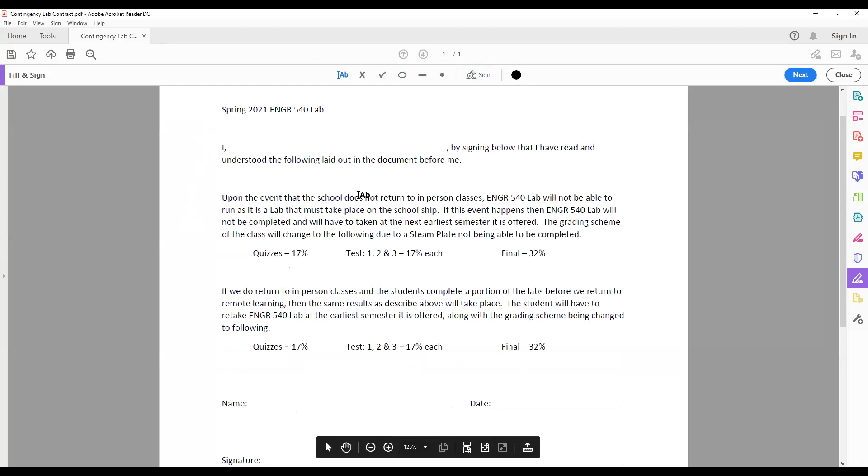So going from there, basically these are two events that could happen. One, we never come back to school this semester - catastrophic failure, basically we don't return to school. If that happens, you will have to take 540 lab the next semester it's offered, whether that be the spring or the fall of next year. If that happens, we can't do the steam tracing or the steam plate.

So that 10% will be broken up into 2% each. Quizzes will go from 15 to 17. All the tests will get 17% each, and then the final will be 32%.

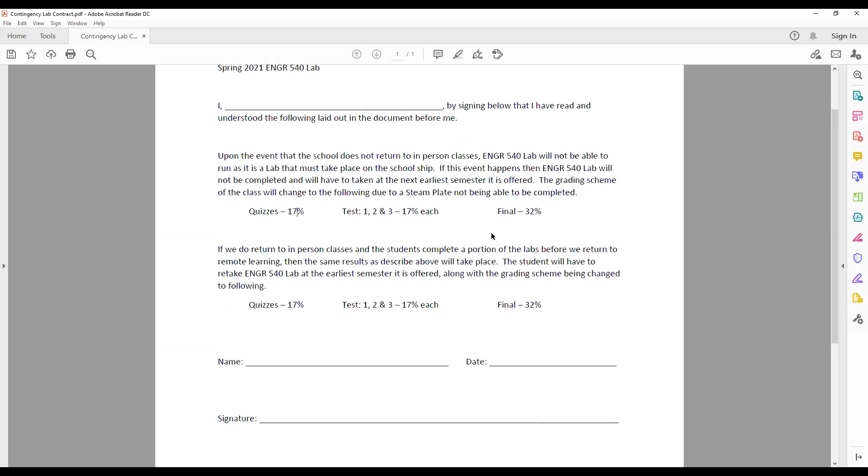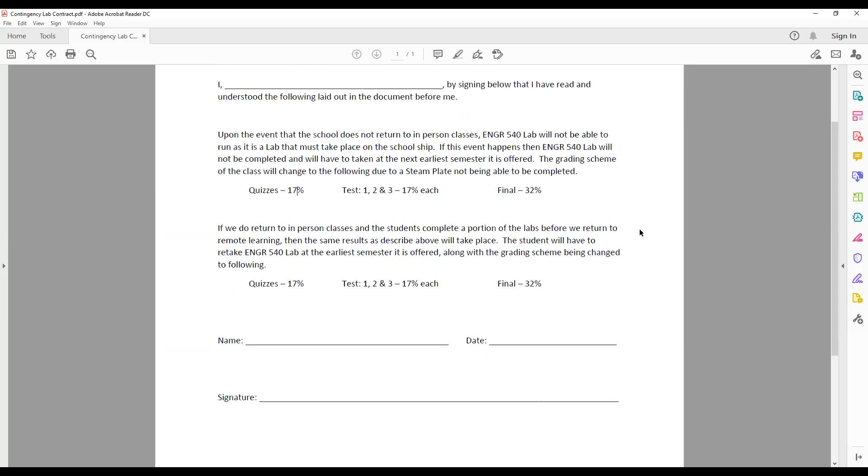Same thing will happen if we return to in person and then we get shut down by the state because we have too many COVID cases. So same thing again - this is a 14-week lab that we push down into a 13-week semester, which is getting pushed down into basically 11 weeks. So if you don't attend all of them, you're not going to be able to go get on cruise. This is a mandatory piece.

So sign and date this, get it to me by Friday. If we print it out, sign it, that's totally fine too - scan it in, submit it. Thank you. I just made it so that if people don't have scanners, which is more common than you would think. When I went to school back in 2011 as a freshman, every time you bought a computer the big deal was you get a free printer and scanner. Now you guys get like headphones or something, whatever it comes with.

Is that one under the lab section of Blackboard, or is that in the lecture section of Blackboard? Good point - there will never be a time I use the lab section of Blackboard.

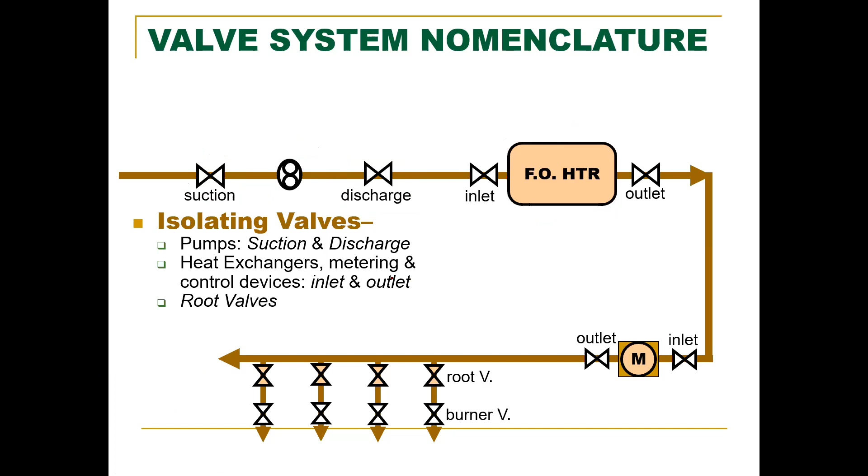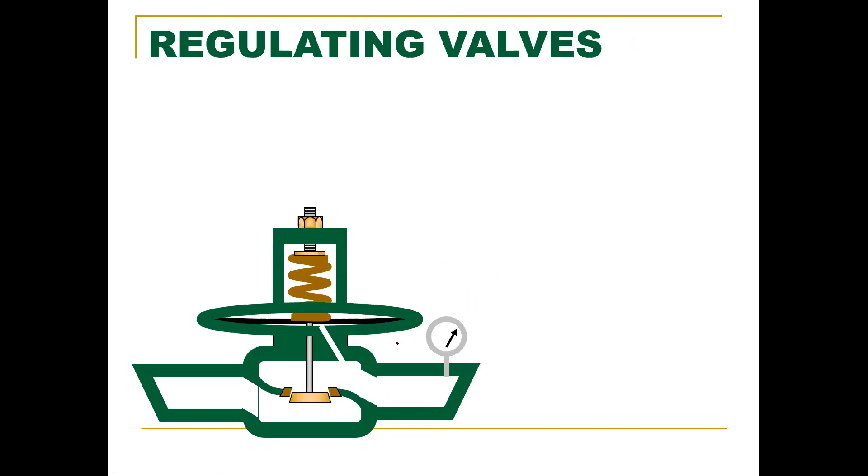So we have a regulating valve, a pressure regulating. This one is maintaining downstream pressure. So if we look at it, the way we always talk about, the new word that we're learning basically with this, is downstream and upstream. What do they mean? What are they in reference to?

The best way to think about it is if you are standing on the edge of a stream. We'll do position 1 and position 2, and then we got letters A, B, C, D, and E. If you're standing at position 1, that's where you are in location, and the river flows this way. What is upstream to you?

A is upstream, because that is the farther up of the stream. The stream is flowing that direction. So what would be considered downstream in position 1?

E. Well, B would be pretty much even with you. I said E, yes, but so would C, D, and E, right?

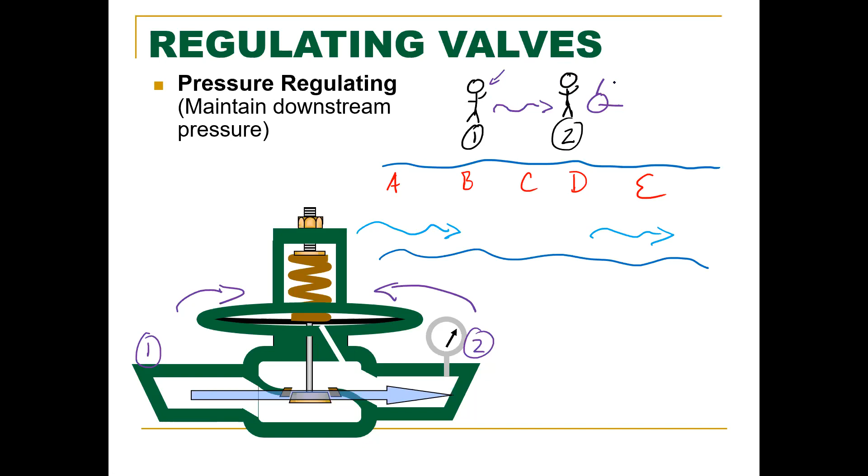And as you change your position or change equipment, position 2 may be a pump. As you change position or change equipment, your downstream, upstream terminology will change. It's in whatever you're referencing to.

So this one is maintaining downstream pressure. We know that by a couple of things as we start to decipher these types of valves. We have a spring, we have an upward seating valve, and we have this black material right here.

That black material, you can think of it as a gasket. It's super thin, super strong. It's usually made of metal, sometimes metal and rubber. It all depends on what type you have.

And what's happening is that it's going to bend, manipulate up or down. I'm going to draw this a little bit bigger so we can see what's going on down in that area.

So that black line is going to be this bottom bowl part. This blue is going to be that gasket material. There's our line right here. And then I'm going to draw in red the stem that goes down into the valve.

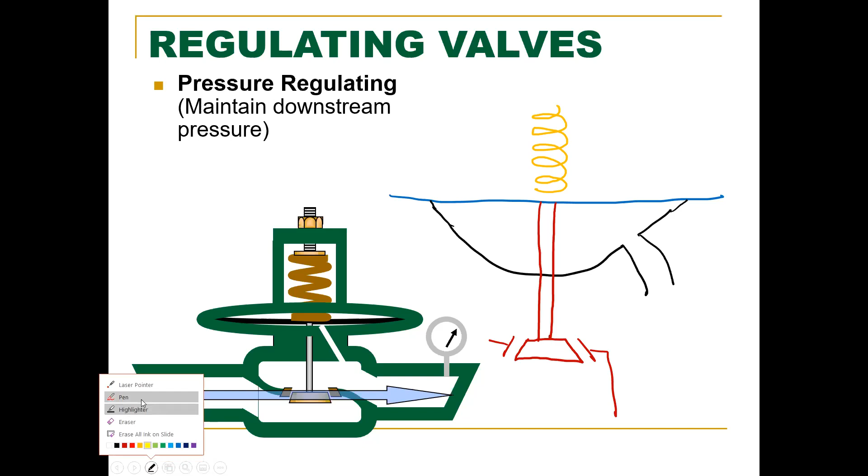So we have three things that we have to pay attention to, that will allow us to decipher any one of these valves and what's happening. The first thing is the spring. It comes down to, where is the spring? Is it above? Is it below? Where is it acting on? Where is the force going to be applied to? All of those questions go to that.

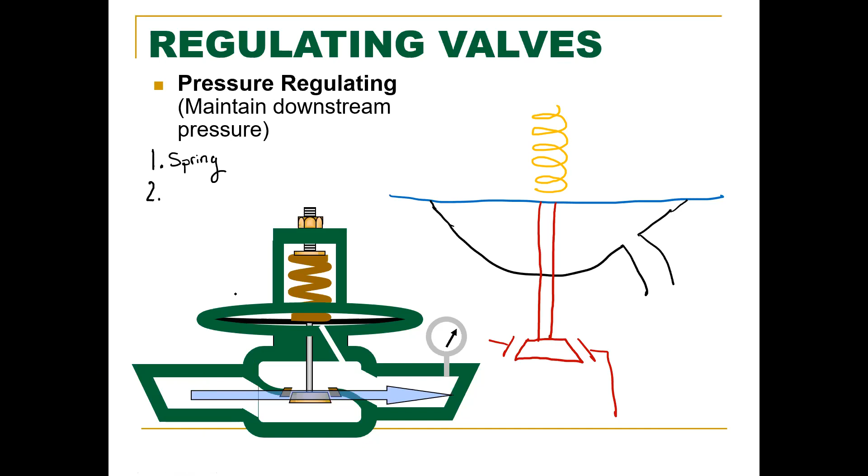Then number two is, where are we taking a sensing from? Where are we concentrating? Where is our input going into the system? Is it coming in below? Is it coming in above? Are we taking it from the upstream side, or the downstream side? So where's the sensing line?

And then finally, number three, is it an upwards or downwards facing valve? Is it going to seat in the upward direction, or is it going to seat in the downwards? So the physical valve itself. Those three things, you'll be able to understand all of these valves.

So first things first, we're going to be doing this with pressure, because we're doing pressure regulating. If I say right here is 60 PSI, and this is just a bigger version of what's happening here, is 60 PSI the same over here and over here and in here, or is it different?

It's different. Why would it be different? Because as it's flooding in, it's going to be moving faster. If it's further down the pipe, then it won't be as fast. So you're saying way down the pipe, there's going to be line loss. Yes. But in this instance, we're talking about a mere couple of inches.

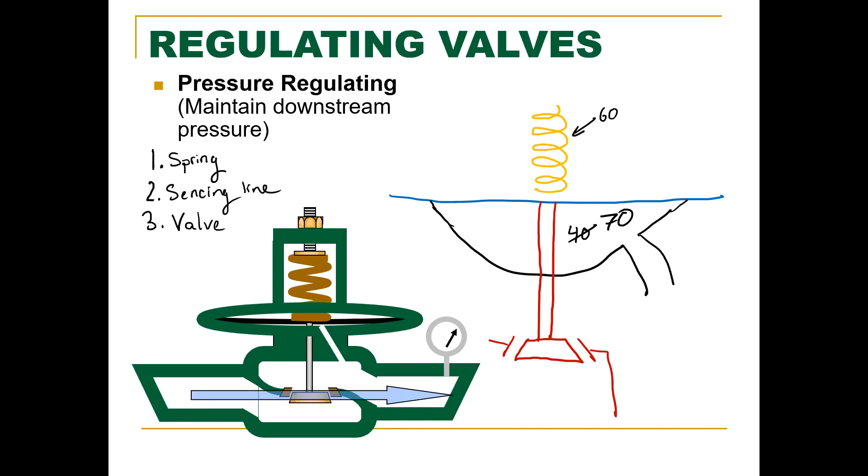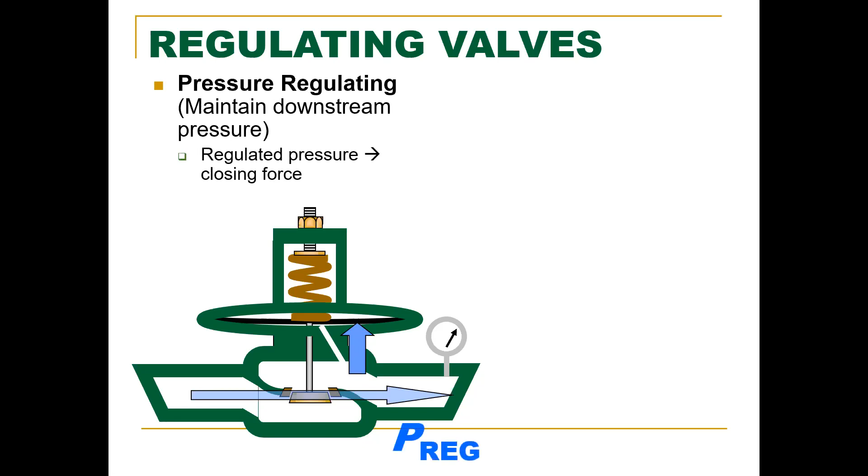Does that make sense to everybody? Okay, good. So the regulating pressure is going to be the closing force, like we already discovered. And the spring is going to be that opening force.

Now we have a different valve over here.

Same three principles apply. We have the spring, where it's sensing, and the valve. Is it upward or downward seating? Granted, these examples have only an upward seating valve, but in the next slide you'll see a downward seating. You can also have a sensing line that comes in on the bottom. So don't think these things will always lead to the exact same result.

These are just the most basic and most simple, efficient way of doing these things. So looking straight at this, what is the spring? Is the spring the opening or closing force? Your spring's the closing force, right? Not just because it's below the baffle, but because this is going to close it with that force. It's where it's physically attached to—it's attached up here.

So if we had a spring worth, let's say, 70 psi, and we want to maintain our upstream pressure at 70 psi, well if this is 40, what will happen? That means we have 40 up here as well, right? So 40 pounds being pushed down can't overcome 70. Now that valve will close and it will allow the buildup of pressure.

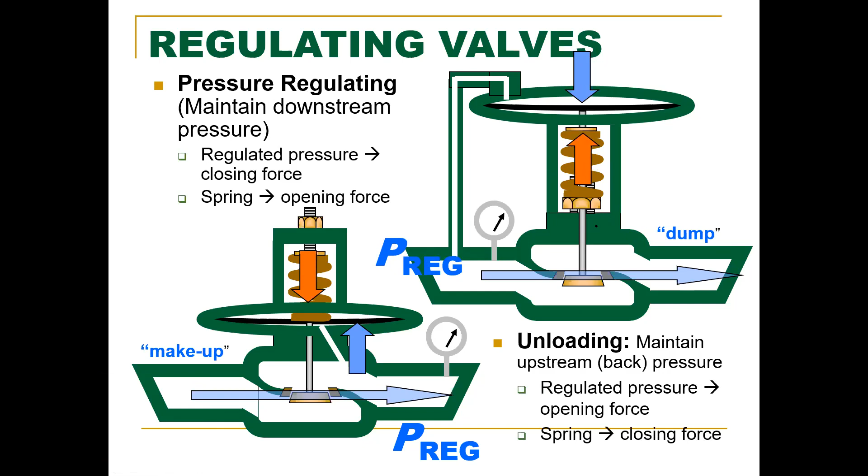So that's our control valve. Then we have a fuel oil pressure regulating valve. Think about it—if we're using fuel oil, and the fuel oil we use on the ship is pretty much one step above asphalt, that's some nasty stuff. We're lucky if these valves have like half an inch in between, an inch if you're lucky. That fuel will clog that up so quickly and these things would just be trash.

So an analog version of what we use with this is some sort of control air—an air signal that will interact with those baffles, that sheet of very thin metal, instead of the fuel. Nowadays you'll probably have a digital version where it's a solenoid valve that's motorized, opening and closing electronically. But this is the analog version—very mechanical.

You can see right here, as I said earlier—sorry, this is downward seating, and this one seats in the upward direction. So it seats going down. You can see that crevice. These aren't the largest valves in the world.

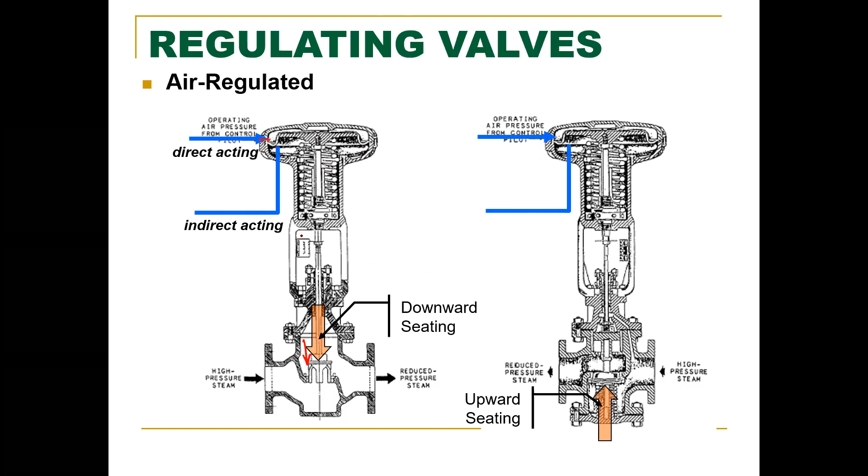All the way up in this area, you can see that little hole, that little line—compared to that valve, that's the air line that comes in. So if we had fuel going in there, this would be a huge problem. Going in on top, those are called direct acting, and below is indirect acting—that's just where the sensing line goes in.

The other place we use it is the fuel oil temperature regulating valve. Again, like we talked about, we go to pressure because pressure is easy. But I said earlier we could use sensors—anything you could measure, we can automate. So this is a temperature sensor. It goes in, sends a signal to what's called a pilot valve, and that pilot valve sends an air signal to another regulating valve.

So it's going to be sending steam to our fuel heater based on the temperature of that fuel coming out. If we need more steam because the fuel heater is cold and the fuel coming out is cold, or we need less steam because it's already at temperature, or it's too hot a fuel. Now, looking at it, these are our air regulated valves—this is our control pilot valve. We have high pressure steam going this way, and reduced pressure steam coming out of it.

So this is an actual spot that we would have on the ship. We would have 600-pound steam going in, and we would have what's called a reducing station, and 150 psi steam coming out.

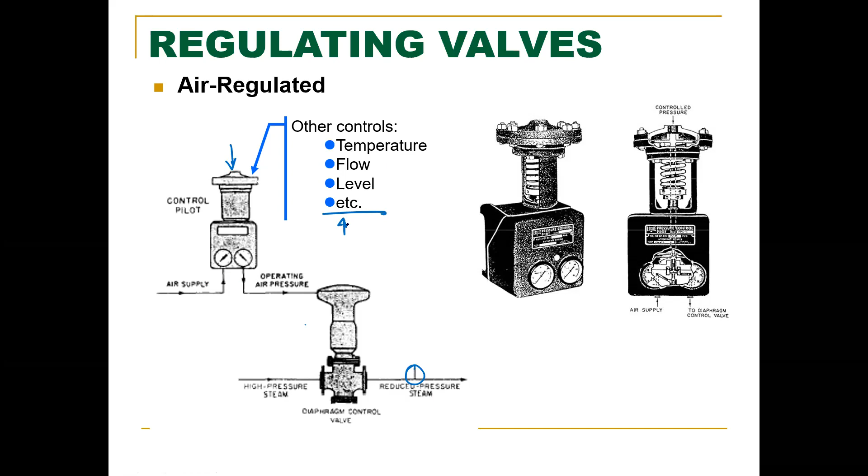Now we have something called normally closed valves. In everyday operation, if you just buy one of these valves and grab it off the shelf and hold it in your hand, this is my valve, it's normally closed. If you put it in the system, it will be normally closed. The only time that normally closed valve will open is under one condition.

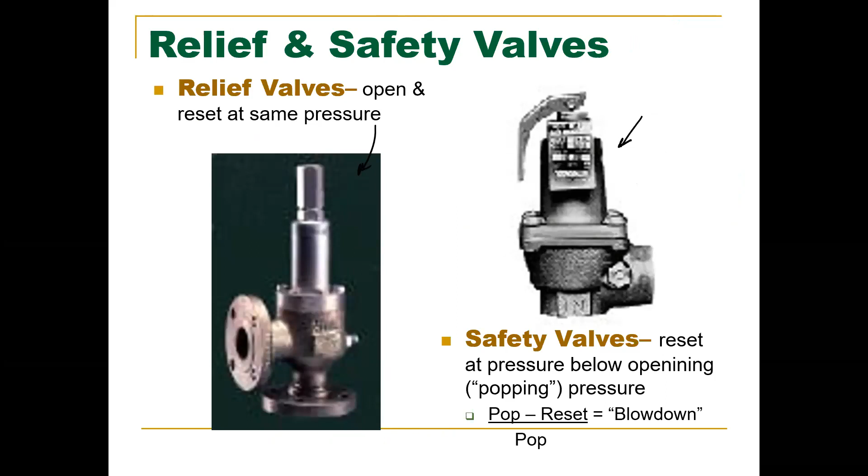Well, this meter might be a piece of plastic. It might have a plastic turbine inside of it - you know, one of those little kid things, a pinwheel that turns a rotation, a really mechanical version of a meter. Well, what if that breaks? And it clogs up.

Well, would we want to shut down the entire ship? Imagine this isn't a school ship - this is steaming across the Atlantic. We have places to go, we have cargo to deliver. Do we want to shut down everything just because of a simple little meter?

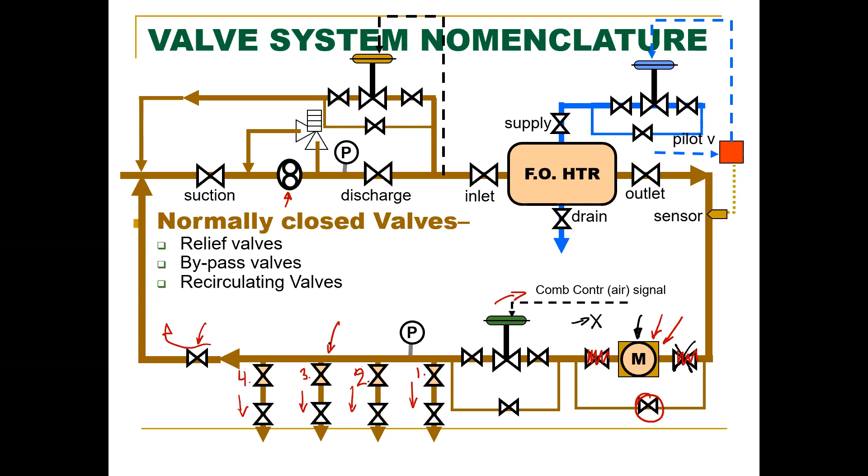Any questions on that? Anything we want to go over again? Because remember, quiz Friday - last class and this class. Anything you want to go over?

Professor, just a quick question - how are we making up that quiz on Friday? I could do it at work real quick at a different time if that's fine. Why don't you come to my office hours on Wednesday? Wednesday, okay sounds good, 1:30 to 2:45. All right, we'll do it then. Thank you. Yep.

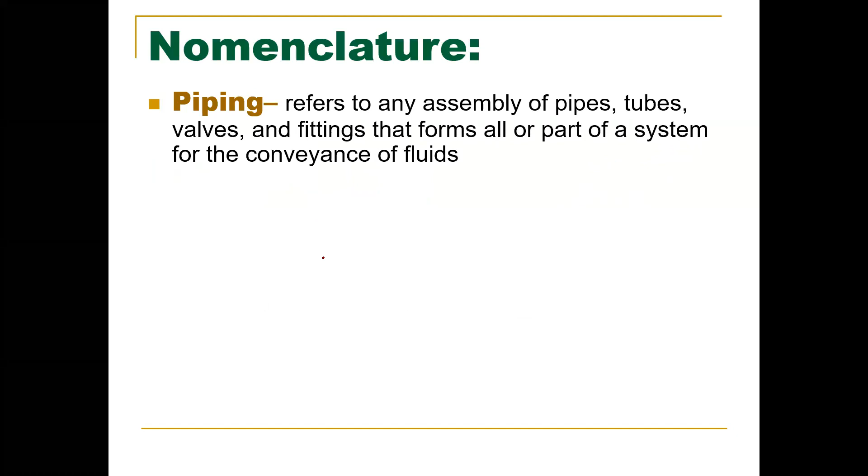So this is piping. Piping refers to any assembly of pipes, tubes, valves, and fittings that form all or part of a system for the conveyance of fluid.

A pipe refers to a non-flexible fluid conductor. It's designated by diameter and wall thickness, strength, or schedule - they refer to the same thing. Then we have wall thickness, and tubing.

Tubing can be and usually is bent at installation. It's more flexible than pipe and is designated by nominal outside diameter and wall thickness. We have fittings - those are devices employed to join sections of pipe, tubing, or hose in a piping system.

Now, we have nominal pipe size, or NPS, which is an approximate inside diameter of a standard pipe, Schedule 40.

Example: we have a 3-inch STD pipe. The outer diameter is 3.5 inches. The inner diameter is 3.068. The wall thickness is going to be 3.5 minus 3, divide that by 2, and we will get the actual wall thickness there.

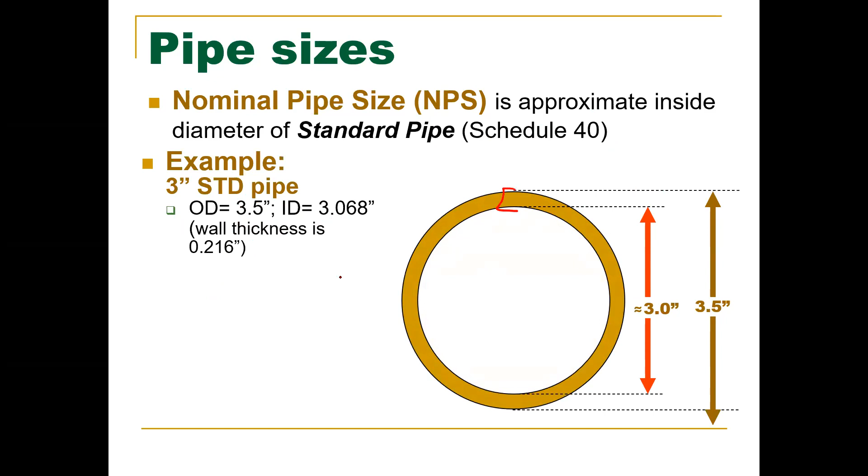Now we have a 3-inch XS, or schedule 80. This has an outer diameter again of 3.5. It has an inner diameter of 2.90. The wall thickness is now 0.3.

Then it keeps getting smaller, and we got schedule 160. So we can see as our numbers increase, we're getting a smaller inner diameter, but our wall thickness is increasing without increasing our outer diameter.

So if you were going to go and order one of these pipes, what would we need to know? Inside and outside diameters - well, we would want to know our inside and outside, but no one is going to label it that way.

If you opened up Grainger, your ordering paperwork, what are they going to be labeled by? I'm guessing like schedule 40, 50, so on and so forth. You're going to basically be seeing only that. All right, give me one second and I'll pull up an example. I didn't expect us to get to this.

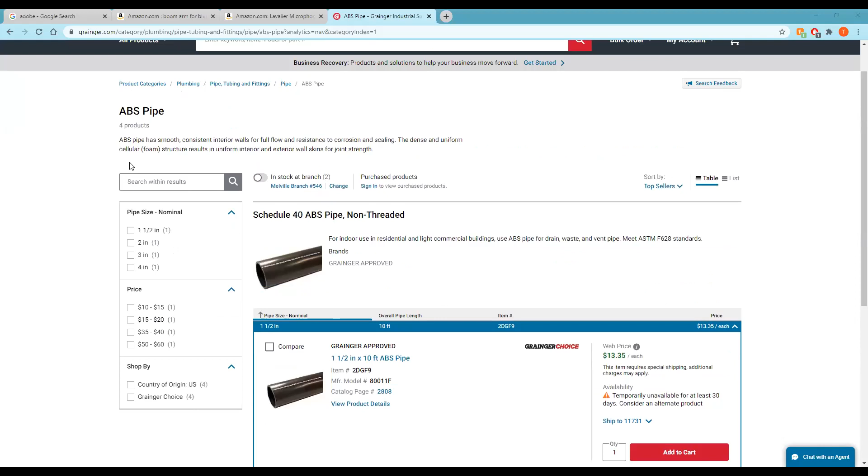We can go for pipe size nominal - so this is 1.5 inch, it's 10 feet long. ABS pipe, this one we could see it's schedule 40. So we'll know our inner diameter because of the fact that it's schedule 40. We are going to know the outer diameter because it's 1.5 inch, and then we know our length.

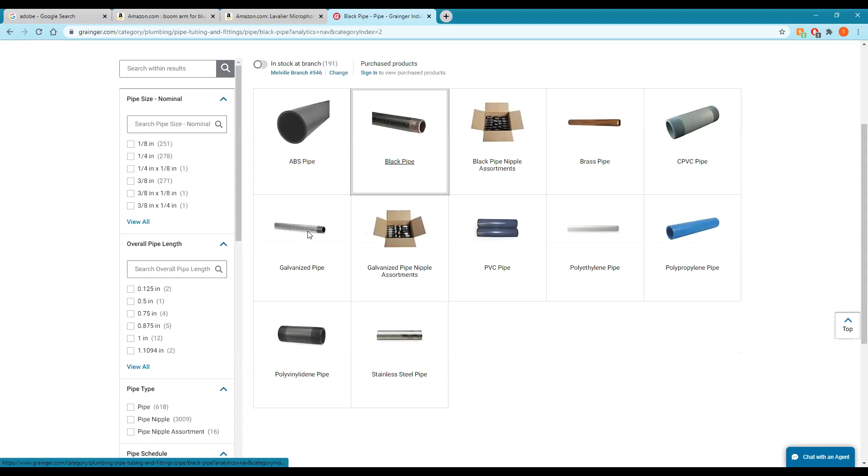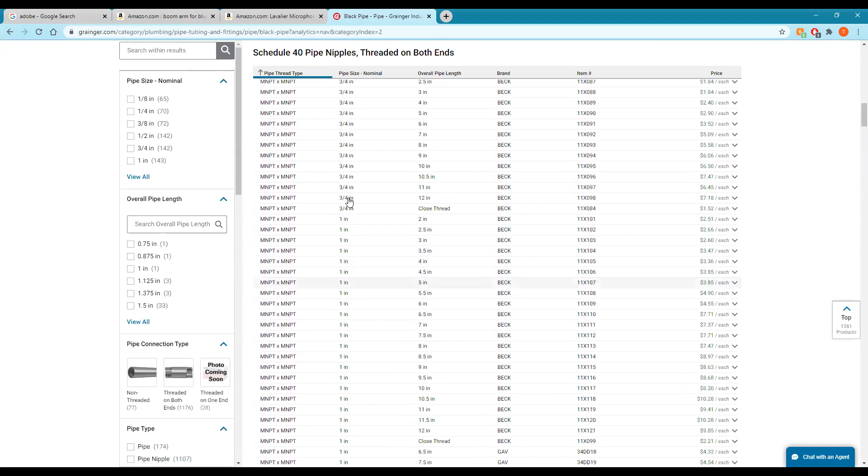Now if we go back here, here's black pipe - doesn't matter what it is every single time. Here's schedule 40 pipe nipples, that's a type of fitting we'll get into probably next class. These are all the different nominal pipe sizes and overall lengths, but even though it's a 2 inch, 1/4 inch, 1 inch, 3/4, they are all schedule 40. So that wall thickness doesn't change between any of these, but their nominal pipe size does.

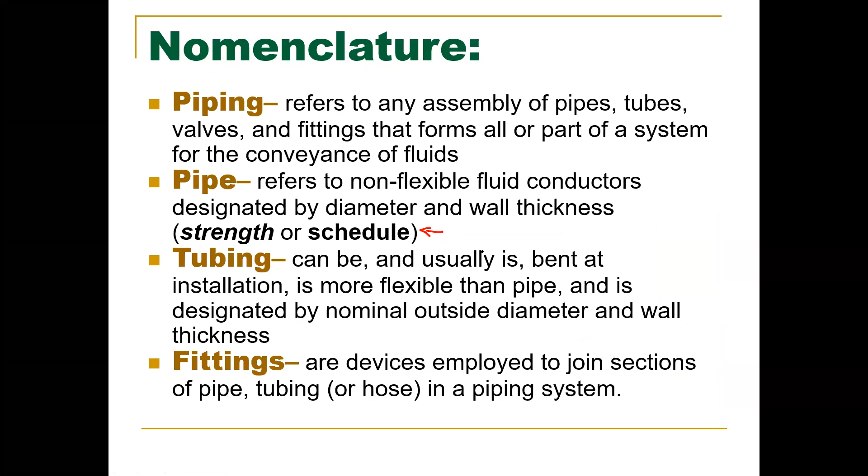What does nominal pipe size stand for again? So our nominal pipe size is that inside diameter.

So again, I'm not going to make you do the math to find out these wall thicknesses - it's just for your understanding. Understand that as schedule goes up, we have bigger wall thickness. It's important to know that.

Because I worked dredges, that's where some of my experience came from. We had armor plated piping - it started its life out at 3 inches thick, because every single day, 24 hours a day, 7 days a week, 365 days a year, this pipe all throughout the entire ship would be sandblasted all day long because we were sucking in sand. Our job was to move sand - we would suck up sand in one location and then blow it out somewhere else, or dump it somewhere else. That's what we were paid to do.

By the end of 6 months, I was taking measurements on piping on the outside wall. There's a device, an ultrasound device, that we can use to figure out how thick these pipes are. I had to do that because the piping we just replaced started to crack and send a slurry of sand and water into our engine room. This basically happened on a monthly basis, so we had to every 6 inches grind off some paint and take a sounding - it was called a UT sounding.

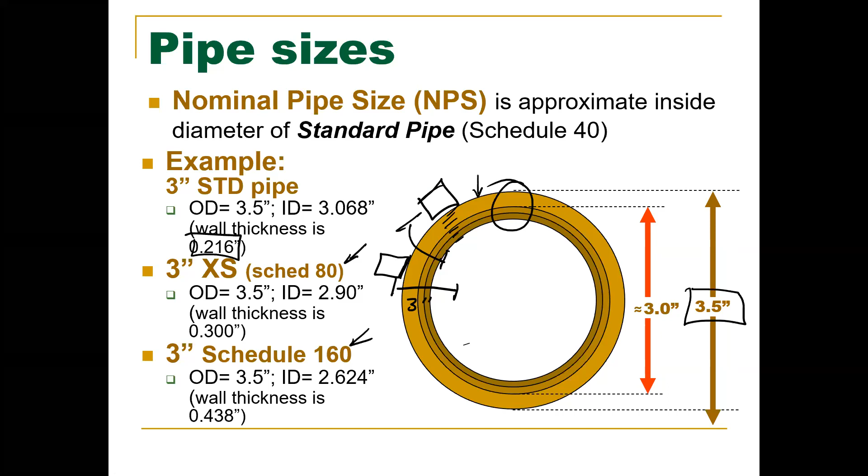You're going to have a really pissed off chief engineer. So these things are important to understand, where it's all coming from. You're going to be the one on the ship ordering. You have the power to order whatever you want. In some companies, you quite literally can order anything that you say will get the job done and get it done faster. They will let you buy.

We were getting ready to buy a battery-powered grease gun one time. We were trying to see how much we can push through ordering, but that's besides the point.

Now, we have nominal pipe size, or NPS. That's the other way you can see it. For pipes with an outer diameter of greater than or equal to 14 inches, they are sized by the outside diameter.

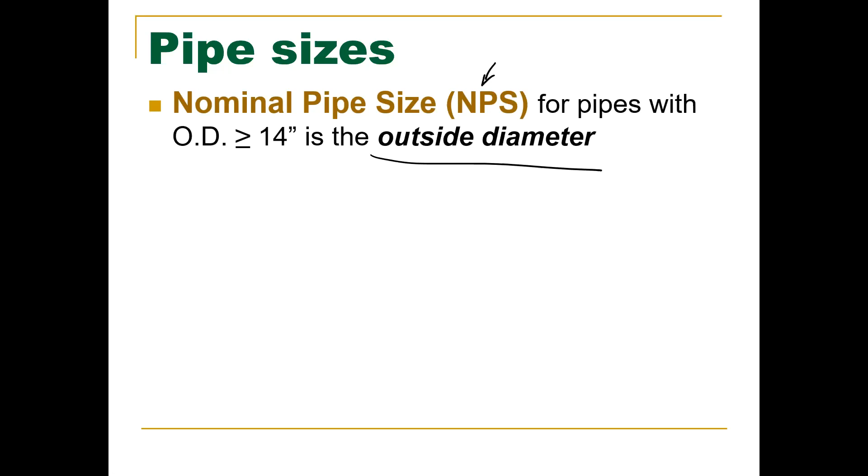So for example, we have a 16-inch schedule 30. We have an outer diameter of 16 inches, and an inner diameter of 15.25. That equals our wall thickness of 0.375. We also have a 16-inch extra strong schedule 40, which gives us a 1/2-inch wall thickness, and so on and so forth.

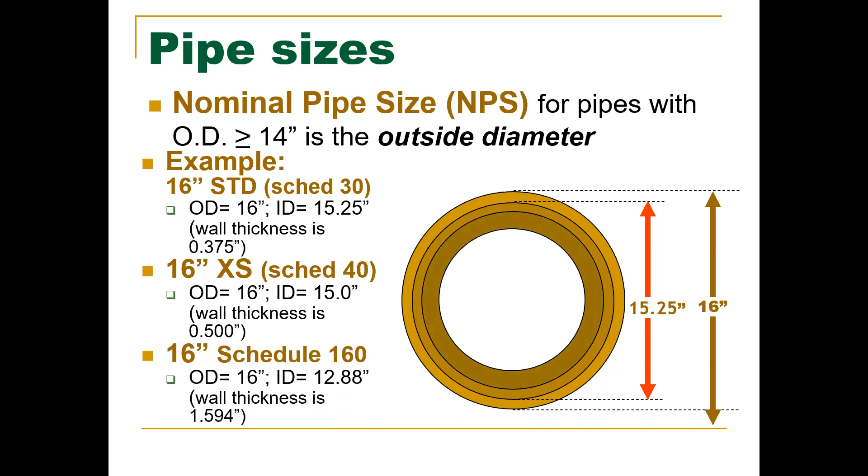So for tubing sizes, the outside diameter is in inches or 16ths. So a number 12 tube has an outside diameter of 3/4 of an inch, and a number 16 has an outside diameter of 1 inch, and so on and so forth.

Wall thickness is given as a decimal, or as a wire gauge number. So 16 BWG is equal to 0.065. An 18 BWG is a thinner wall, and a 14 BWG is a thicker wall. It follows the same way as any sort of wire. A 12 gauge wire is going to be a thicker wire than an 18 gauge wire, which is going to be very thin.

So copper tubing is often designated by slightly different parameters: its outside diameter as well as its wall thickness. So you can have a 1-inch copper piping, again by its outside diameter, or a 3/4, or a 1/2 inch. Its wall thickness is not schedule, but different letters or types. This goes down to the type of material it's made from, the composition of the copper, how thick it is, all these different parameters. So type K, L, or M. K is the most robust, so it has the thickest wall and can stand the most pressure, things like that.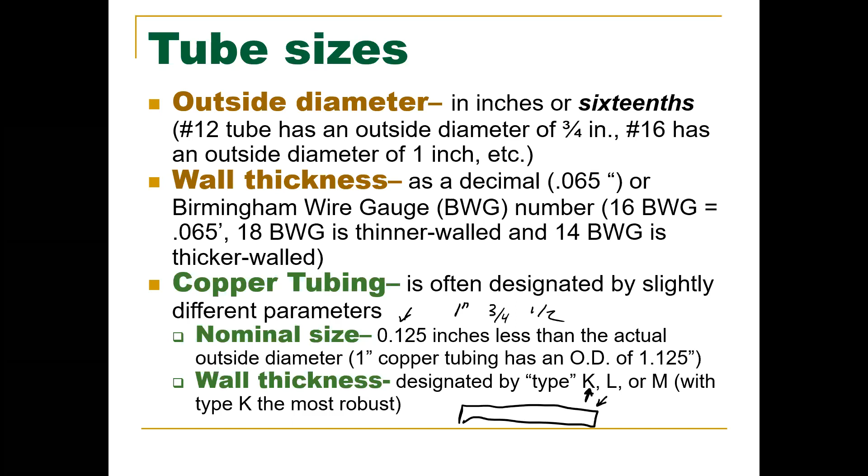Not only that, but the thing you also want to concentrate on is where in the area it's going to be. I just did a piece of piping in my garage that's exposed. I had to reroute it. We had to use 1/2-inch piping, and we had to get K for it, because it didn't really matter—it's just hose water. But the issue is that it's routed on the outside wall of my garage where we hang a lot of things, so we didn't want it to dent and get destroyed easily. So we wanted a thicker, stronger wall. It wouldn't come down to the fact that after 6 months, just like the armor plated steel of my dredging days would destroy this pipe—it came down to the area or environment it's going to be in. So things to think about.

So there are different ways that pipes can be connected. Just want to see something—that's not what I wanted. That's what I wanted, there we go. So we can weld them. If they are two pieces of steel, it's very easy to weld. We have what's called a butt weld.

All right, so we're not a welding class, but these are things you should know.

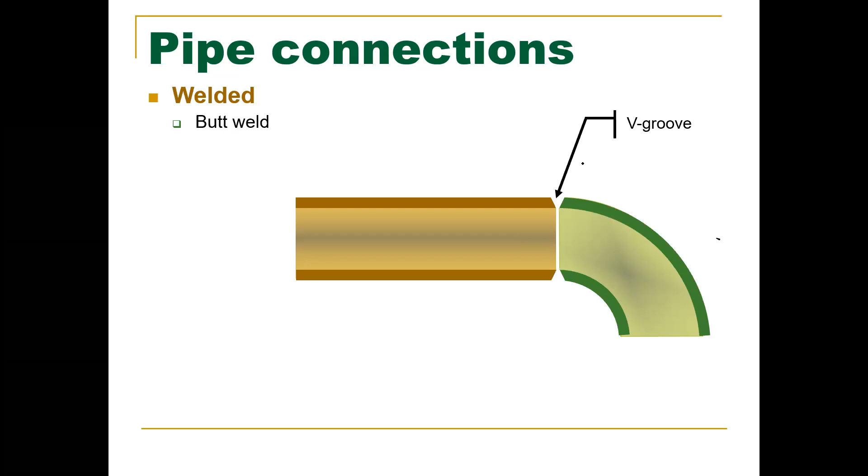This is what's called a V groove. It's grooved out on either side of the pipe at a 45-degree angle, on both sides. They connect up right onto each other; one is not inserted into the other. They are the same size, inner and outer diameter. This V groove is important.

Now, there are things out there called backing rings. They're disposable; you don't collect them after you're done with them. It's a ring that goes on the inside of the pipe, and it's supposed to keep the weld in that spot.

Now, as you weld it, you weld inside that groove. You are utilizing both pieces of metal, and you will form a weld inside of there.

Again, it says the backing ring is removed or ground away, but you're not going to be able to get that out on the inside. So, you just leave a backing ring on the inside of the pipe when you're done welding it up? I've never used a backing ring. Most of the time, you pretty much are just going to weld these two things together.

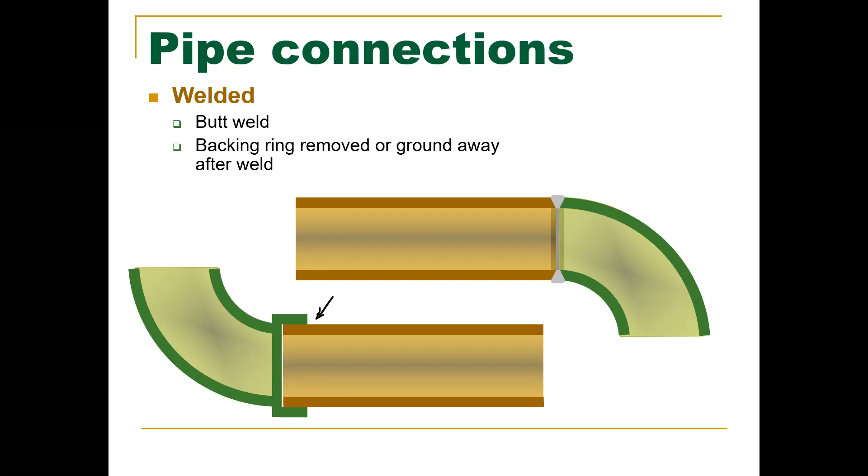Now, another type is this one that has a socket in it. More often than not, this is basically what you'll see when you use fittings, pipe to pipe. If you're going to have a 90-degree fitting right here, it will have this type of piece, where its inner diameters match up, as you can see.

But this outer diameter right here is much larger, where this pipe will be able to be inserted into it. And where the weld forms, let me clear it up so you guys can see this, it will be around the edge right there. That's called a fillet weld.

Most of the time you will not just weld once. You'll have an initial bead that will go there, so a bead of weld, and then you'll have two more. You'll put one more here, and then you'll put another one here. So you'll basically make it a much larger weld.

Now, if you notice, there is a slight gap in there, correct? Was that just bad animation, or is it purposely done? Purposely done, I'm guessing, to allow for expansion.

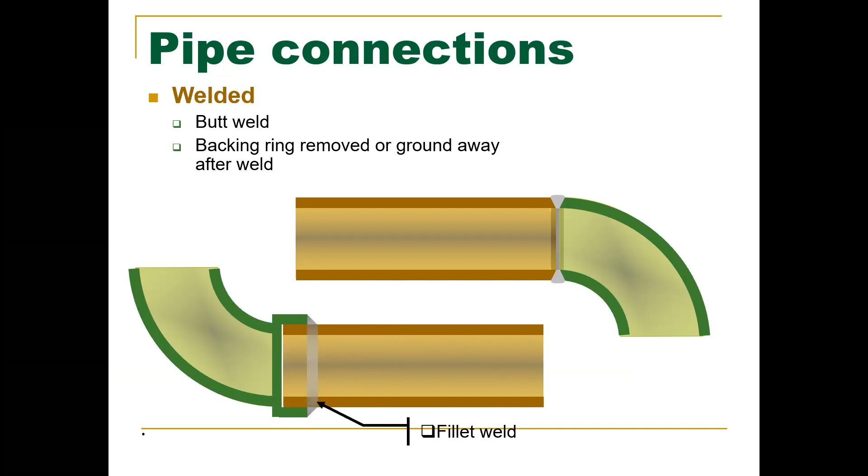Now, you can also do threading. There's the American National Taper Pipe Thread, or NPT. This is not the same as machine threads on nuts and bolts; you cannot use a nut or bolt and thread it into a pipe with it. Those use not NPT, but threads per inch, or TPI. So NPT is the National Taper Pipe Thread, or just call it National Pipe Thread.

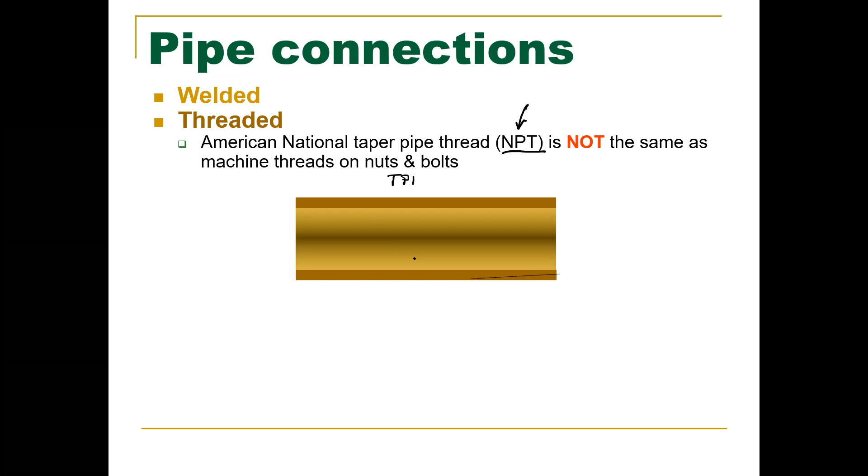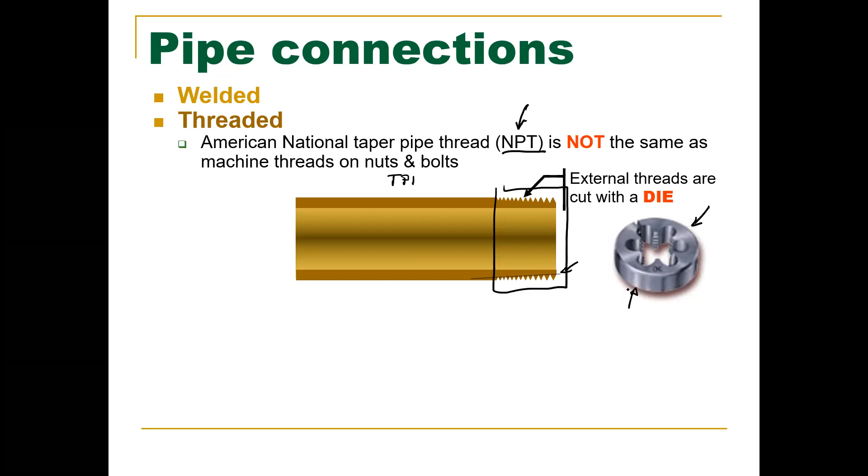If you notice, we have a slight taper; you can see that line right here where it forms. This is an external thread, external in reference to the pipe, and that is cut with a die. That's what a die looks like right there. So the die, referencing the die now, uses internal threads to cut external threads on your pipe.

All right, we could see we have a little bit of space in between each one of those threads. Same thing in here, we have those little ovals in there. And that's allowed because think about it - we are cutting, we are removing material, correct? So every time that we do that, we want that material to go somewhere. That's why drills have those flutes that they go by, right? That's not just a waste of space. That's where all that wood material goes out and flows out. All right, it's the same thing here.